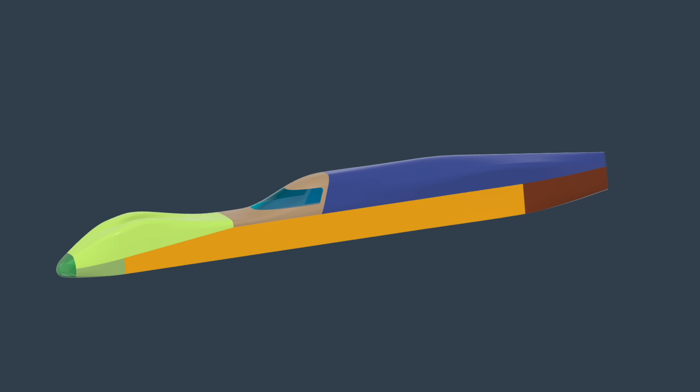I've broken up my race car body into several different parts: the engine cover, this part I'm calling the diaper, this stuff up here, and then this middle lower section that I'm calling the taco. The taco is made of 6 parts, all flat. They each have aluminum strips that will be bonded in to aid attaching them to the car, and I have templates for the wheel cutouts that will go in the bottom 2 pieces, but that's as complex as they get. Mostly they're just simple, flat parts.

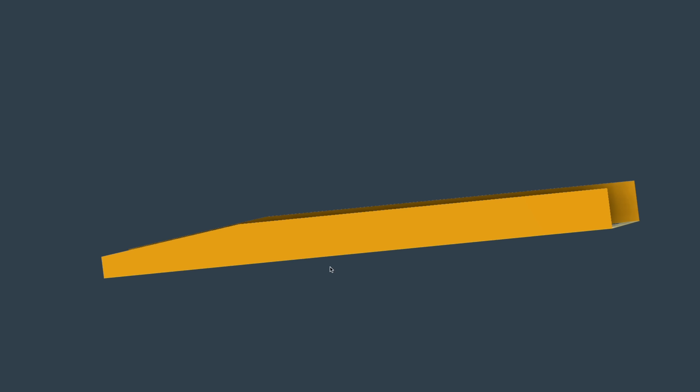It's weirdly expensive to buy flat panels of fiberglass, so I just decided to make them myself. Presumably this will be super easy, the parts will all come out nicely, and we will not almost set the garage on fire.

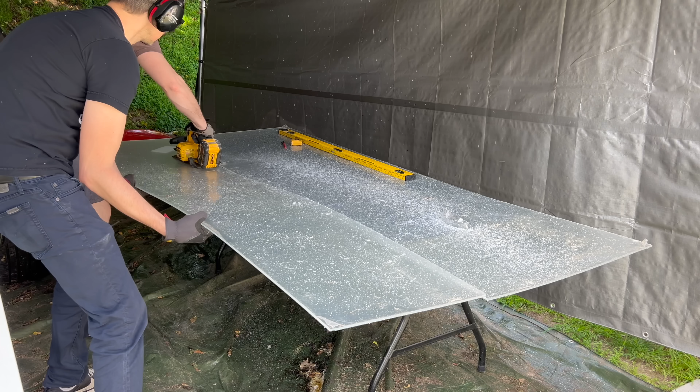We needed a flat surface to start with, so I took my 2 tables and leveled them out with some 3D printed spacers. I have this 4x8 sheet of acrylic that's been sitting in my backyard for about a year, so we chopped off about 2 feet from one side to use as the flat surface. It had a film on it that we tried to peel off, but since it had been baking in the sun for over a year, it didn't want to come off cleanly, so we just gave up and left it on there. It's probably fine.

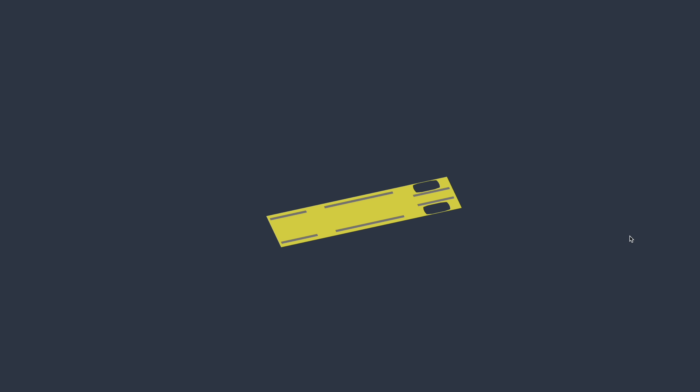Here's how we're going to do this. We're making these 6 parts, and we're going to start with this one. This is the lower rear part of the body. It's flat, except for the cutout for the wheels, and it has 6 metal strips bonded in to help attach it to the car frame.

The straightforward way to do this would be to just lay down some fiberglass, paint on some resin, and then when it's cured, cut out the final shape, and then use some adhesive to bond in the rails. But we're going to make this way more simple by making it way more complicated.

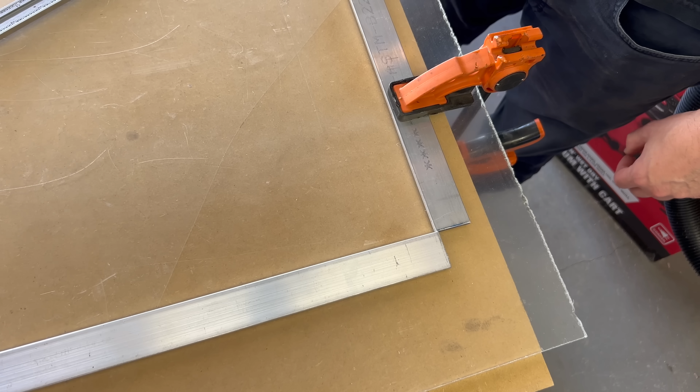Here's the plan. First, we're going to completely reorganize the garage. Why? I don't know. It just seemed like a good time to do that. Then we will lay out a perimeter of some straight edges using, say, aluminum bar stock. We'll attach that to the table using some double-sided tape.

Then we can coat the whole thing in some release film, carefully trimming the edges so that they nestle into the aluminum frame. This gives us a perfect rectangle that is exactly the right size that we need, so no trimming is needed.

As for the wheel openings, I had my friends over at Send Cut Send laser cut out some chipboard with the right size cutouts. We'll just leave this in the layup, and that'll be our trimming template to cut out the wheel openings after we're done.

We chopped the fiberglass to exactly the right size so it would neatly fit down into our little rectangular cavity. About this time, we realized that our rectangular cavity was noticeably bigger than our carefully cut fiberglass pieces. This is weird because I used my giant calipers to get the exact correct...

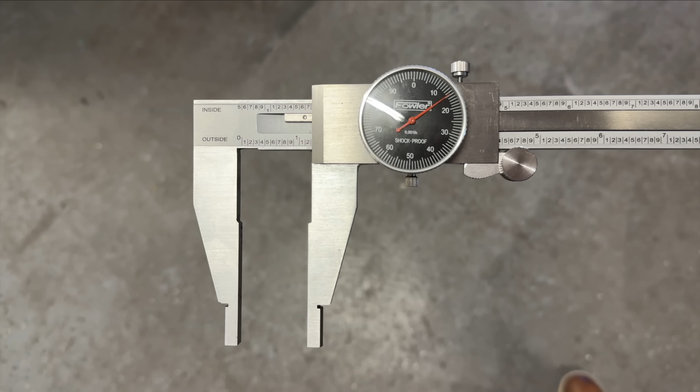Oh, I know what happened. These calipers have a dimension for inside, as in you're measuring the inside of something, and outside, as in you're measuring the outside of something, but I always read it as inside being the inside of the calipers, and outside being the outside, which is wrong.

So we had to fix the rectangle. Slight issue, and surely our last problem.

Since we're being fancy with the rectangular perimeter mold, we also decided to get fancy with the aluminum strips. Rather than bonding them on later, we just decided to put them in the fiberglass. I thought about putting them on top, but I figured why not stick them between two plies of fiberglass so they're securely in the part and will never come out.

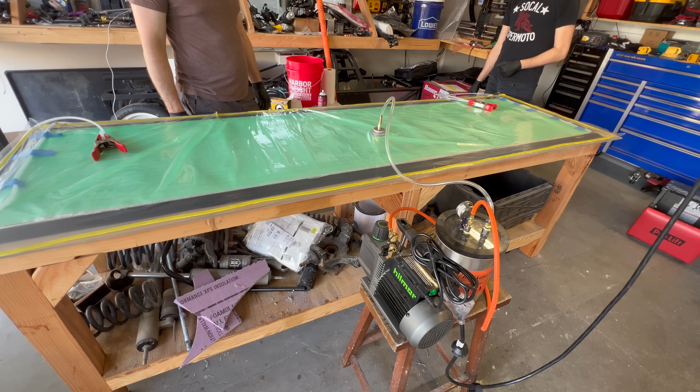Also, further complicating this simple method, we decided to do a vacuum infusion. The advantage of this method is that it's usually a lot less messy and you get a really good fiber to resin ratio, so you don't have extra resin making your part unnecessarily heavy.

To do this, you completely seal up your part in a bag, you pull a vacuum somewhere, we chose the middle, and you suck resin in from somewhere else, we chose the two ends. It's important that you don't have a leak here, so pull down the vacuum and check for leaks. Plug any leaks with this tacky tape, and you're good to go.

Mix the resin thoroughly, clamp your hose to the side of the resin bucket, and start sucking. For this, you might want to use a resin that is specifically made for vacuum infusions, like this. This stuff is a lot thinner and flows easier.

If you use regular resin, it might move so slowly that it starts to cure before it gets to the vacuum port, which would be bad, and then you'd have to find some clever ways to get resin into a half-cured fiberglass part. But not this time. This time it worked. We did have a few air leaks spring up, but we plugged those up with some tape and called it a day.

Alright, so you know that infusion resin I got that flows really well? While the part was curing, I decided to read the instructions, after we already started doing this. This stuff requires a post-cure.

It mostly hardens at room temperature, but you're supposed to bake it at 180 degrees the next day, and I don't have an oven that can fit something this size. Wait a minute, yes I do.

Well, kind of. I have an oven that can fit half of this thing. So I baked it half sticking out of an oven for a few hours, then I flipped it around and baked the other side. So you could definitely call this part half-baked.

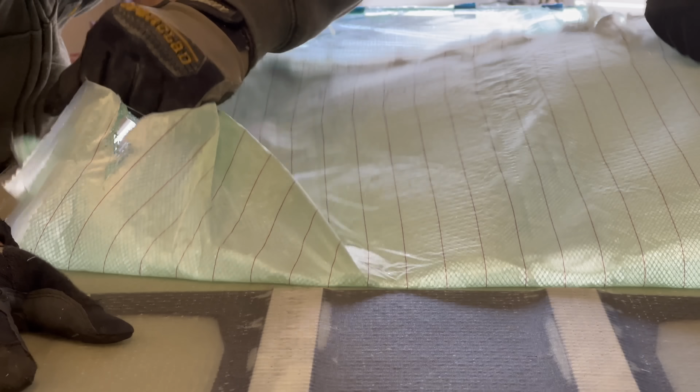After that, we peeled off the peel ply and saw that the part was not 100% great. There were a lot of dry areas from where air got into the bag as it was curing, especially around the aluminum bars. There was a lot of bridging because we didn't tuck the fiberglass into the corners and we didn't have enough resin to wet it out. Should have seen this one coming.

I can probably fill a syringe with resin and fix these parts, but the sides are another issue. The metal bars that closed in our square were too tall, and so air got into a couple of the corners, and it doesn't look good. It's definitely not the hard, solid edge I was hoping for.

Perhaps we got too fancy with this one, trying to avoid cutting it by boxing it in and adding the aluminum bars inside the fiberglass. We will learn and simplify next time.

So we have one piece done of 6, and honestly we might have to remake that one, so we've made little progress. For now, we're going to make these 2 side pieces, but we're not going to use the perimeter aluminum like last time, and we're not going to lay it up with the aluminum in the part. We'll cut out the final piece from a slightly larger piece, and we will bond in the aluminum with some adhesive later. So we're just making a flat piece.

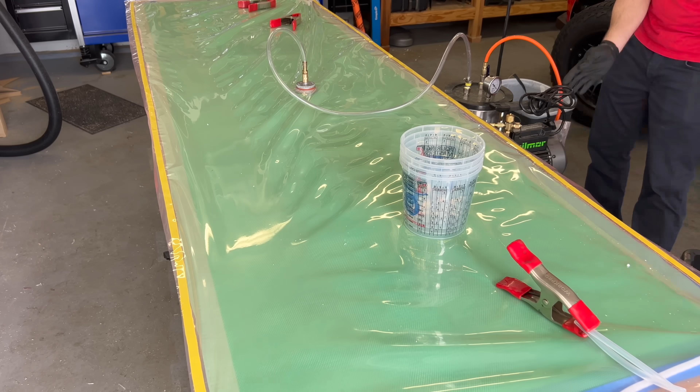How hard could it be? Since we're making a flat piece and cutting out the part later, we decided to just lay up both side pieces at once in one larger part. We did everything similar to last time except no aluminum, just fiberglass inside a vacuum bag. We also decided to use regular non-infusion resin since I didn't want to have to do that half-baked idea again.

We were worried it would go too slow, but at first it was doing great, moving towards the vacuum port in the middle. We measured its speed and calculated that it would be done in about half an hour. Half an hour later, it was not even close.

The resin started to flow really slowly, and we were afraid it wasn't going to make it to the middle. So we did something risky. We cut slits into the tape around the side and added 4 extra tubes to pull in more resin closer to the middle. And this worked pretty well, actually.

We just kept mixing resin and letting it flow into the part until Dave noticed something odd. 'Oh, this is smoking. I'm not sure why.' Perhaps I accidentally mixed in too much hardener in the last batch, but the resin was going into thermal runaway.

Sometimes when this happens, it can start a fire, which I did not want in my garage at this particular moment. Unfortunately, we had taped the buckets down so they wouldn't fall over, so we had to peel off the incredibly hot buckets, and we definitely should have taken a moment to grab some gloves for this. We set the buckets outside where they could think about what they had done.

The rest of the infusion went relatively well, except that there were a couple of dry spots. I marked them to see if we could get any movement, but there was none. So I filled a syringe with some resin and took care of it myself.

This part came out better. Still not perfect. There were some dry spots, some wrinkles, some dog hair. But I think we can make a usable part out of this. We're getting better. Let's try this a third time.

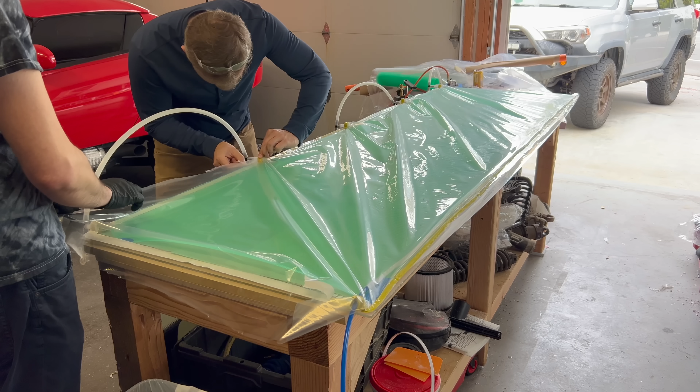Okay, so we've learned some lessons. I've already forgotten most of them, but we did learn them. So now, armed with our new knowledge, we are going to try to make 2 more side pieces. Again, simple, flat piece, nothing fancy.

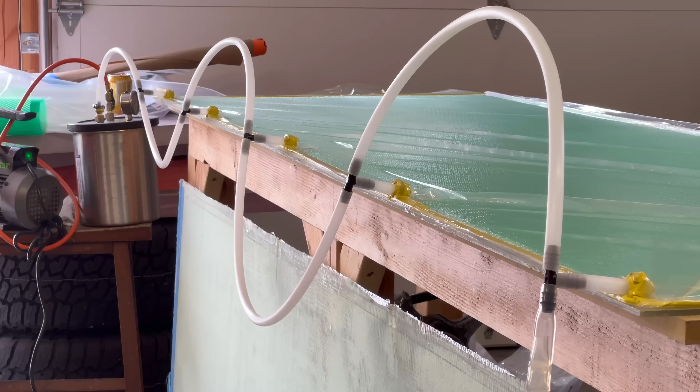But this time we're going to make sure we can fully infuse the part before it starts to cure, and we're going to do that by having the shortest path for the resin to flow. We're going to feed in the resin all along one of the long edges, and we're going to pull vacuum from 5 separate spots along the other long edge. This gives us only 1 bucket of resin to worry about refilling and also possibly bursting into flames, and it gives us a much shorter overall path.

Again, at first, it went great. The resin was moving fast, crawling along one edge and making its way to the other side. We did still have a fair amount of bubbles.

Ideally, you would mix the resin and then use a vacuum chamber to suck out the bubbles. But our vacuum chamber was busy sucking resin through the part, so we just had some bubbles being sucked in. After a while, though, the sucking slowed down and then pretty much stopped, and we were not at the end yet.

Not even close. I figured we could swap one of the vacuum ports to a resin port, plugging that part of the vacuum hose and running a new hose into the bucket of resin at that location. That helped a little bit, but not a ton.

While this was going on, I decided to double check the temperature of the resin buckets to make sure everything was reasonable. One was at 70 degrees, then later at 75 degrees, then a few minutes later at 286 degrees. So we moved that one outside.

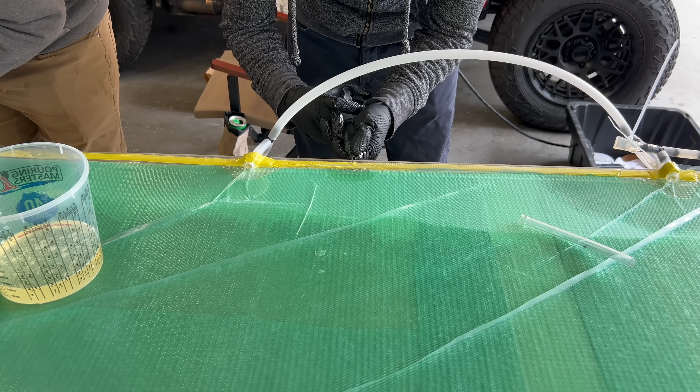Not sure why we're getting random super high temperature resin, except that I am being a little sloppy with measuring the resin and hardener. More importantly, our infusion was no longer infusing, so we mixed a little more resin and busted out the syringes. This one came out maybe a little worse than the one before. We had a dry spot here we couldn't get to wet out. It seems fully resinated on the surface, but the middle is definitely dry. We might still be able to make this one work by trimming this part out carefully, but overall we are doing pretty poorly in trying to make the simplest possible fiberglass shape.

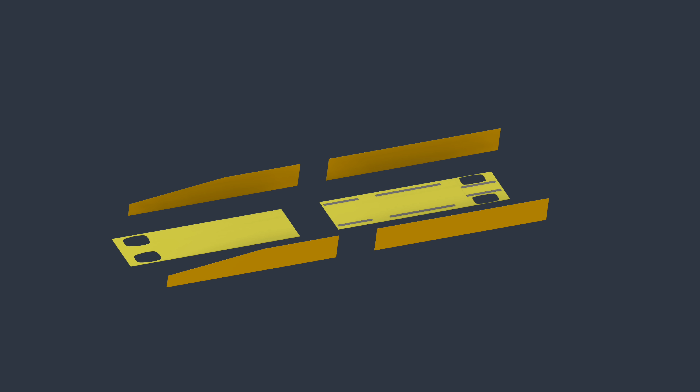This is the final flat part that we need to make, assuming we don't have to remake some of the other parts, which we almost certainly do. And this time, we're going to apply the lessons we've learned. Not lessons on proper vacuum bagging, not lessons on bridging and adding parts into the layup. This time, we're going to apply the lesson that simple is good, less is more.

We are going to do this the easiest possible way. We're going to lay out fiberglass, get the easy, inexpensive polyester resin, and we're just going to brush it on. No vacuum, no complexities, just the easy way.

I grabbed some of this polyester resin from the local auto parts store, and pretty much immediately we noticed an issue. The lid wouldn't come off easily, which is a problem when using a can of resin that's previously been opened. But this one is brand new, or it's supposed to be. Could be just really old.

We got it open with the help of some pliers and noticed the second issue. It was black, like motor oil black. It's been a while since I've used Bondo fiberglass resin, at least 10 years, so maybe I misremember the color, or maybe they changed it. It smelled like resin, mostly.

We decided to give it a go on this relatively cheap piece of fiberglass, seeing if it was maybe fine. It was not. Something was wrong. I thought I remembered that you had to pierce these hardener bottles with a pin before you use them, and the one we used was already pierced.

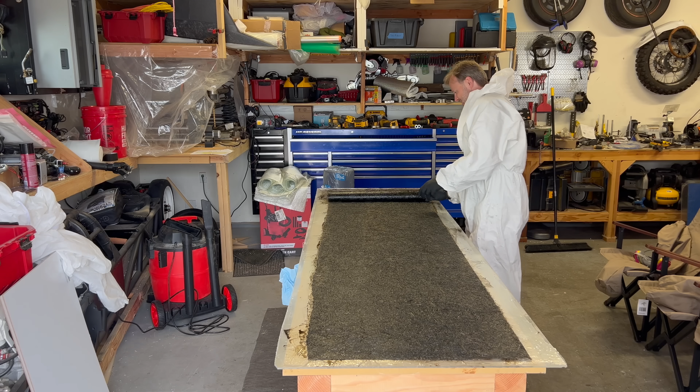We stood there looking at this oil black fiberglass with resin that was clearly not hardening. It was definitely not resin. Now, this sounds insane, but here's what I think happened. Somebody bought this gallon from the auto parts store, used most of it, then refilled the hardener bottles with water, and then refilled the resin can with, best I can tell, motor oil. And then they returned it to the auto parts store in the most egregious bit of white trash ingenuity I've seen since I moved out of Oklahoma.

Bold. We took it back to the store where the guy behind the counter was skeptical, which I would be too, but he did give me a refund. We went to a different auto parts store and got another can of resin, this time checking to make sure the hardener wasn't already opened.

So, try number 4 and we've already screwed up the layup, but this time it was not my fault. We mopped up the oil that was on the table.

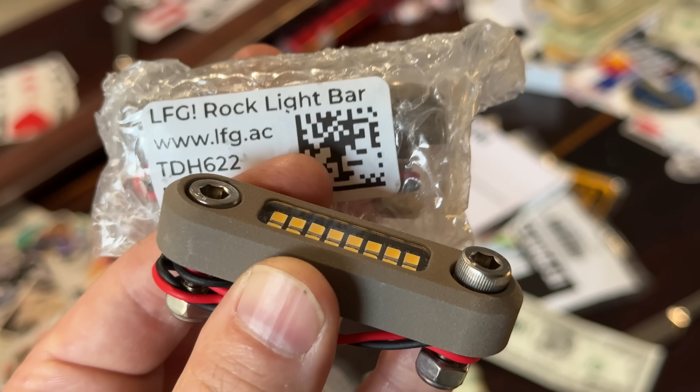I also got some stuff that you could call marketing. Lots of these cool rock light bars from LFG Automotive. I got some coffee from Chromatic, but there was no sticker in there, so I just got some free coffee. Shipadick.com decided to send me some stickers and a coupon for some free giant cardboard dicks to be shipped to someone, so that's nice, I guess.

The top bribe award so far goes to Roam Adventure Company, who sent in 2 camping chairs, a cooler, and a rugged case with a lid organizer. I'll probably mount this permanently on the land speed trailer, so I'll slap one of the stickers on the side for that. For now, it's going to hold all of the stickers until they go on the car.

A few people decided to send in hundreds of these stickers, so we're full up on these guys - no need to send more. These are some of my favorite stickers, all good, all going to get prime placement on the car. I'll go over all the stickers in detail later when they go on the car.